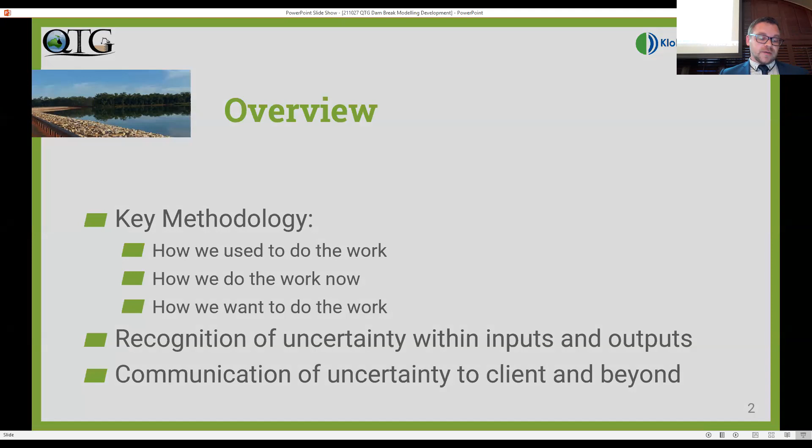This change isn't unique. Government and municipal facilities have also seen a reduction in the apparent risk tolerance from the general public in relation to infrastructure immunity and the commensurate increase in demanded design life of public infrastructure. So my presentation today intends to cover some of the developments that we've seen over the recent period. I'll also cover some emerging methods and what will likely be commonplace in the near future. To cover this scope, I'll approach it in a traditional engineering fashion, which is to try and represent an incredibly complex issue by breaking it up into smaller, simplified pieces, solve those pieces and hope it still represents the final product when we put it together at the end. This way, hopefully I'll avoid any overly technical issues while still providing enough detail to explain the challenges involved. I'll be presenting this from my point of view and my experience, and given the expertise in the room, I'm sure I'll raise some points of comment or conjecture. So please, I'm happy to address those or receive comment at the end of the presentation.

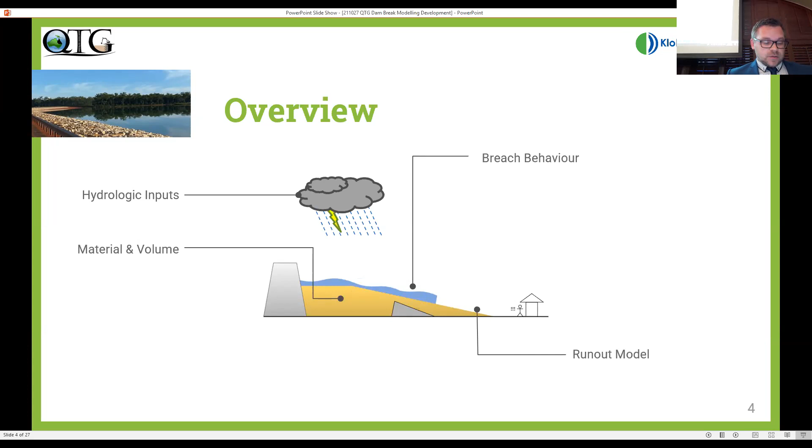I'll start with an overview of the inputs to a given study. Here we have our facility with a finite volume of material, of which it has particular material properties. Its initial state can be described as a solid mass of material with geotechnical properties. There may be some additional event contributors to the breach itself, and then once that material is mobilised, it can no longer necessarily be described with geotechnical parameters, and its behaviour may be represented as a non-Newtonian fluid. The run-out behaviour of this material can be estimated using numerical models and the potential impacts quantified. The summation of these downstream impacts forms the basis of most regulatory and industry-guided consequence category selections.

So initially, we'll look at the material and volume aspects of the system. I recall my first application of a TSF dam failure some years ago.

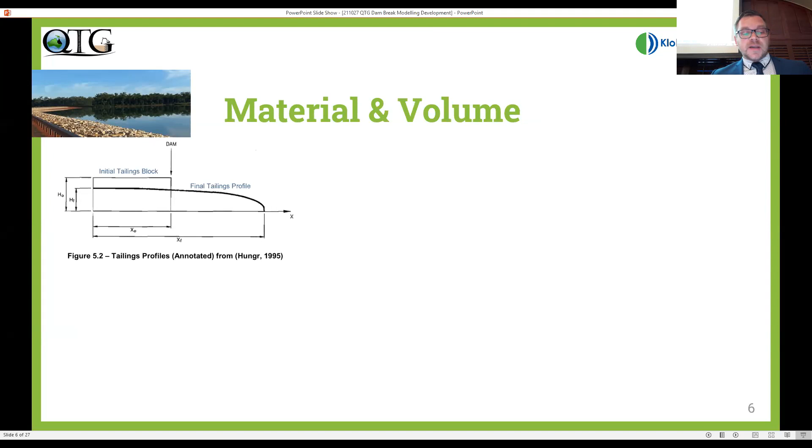I used a simple run-out formula that was based on the estimation of shear strength and assumed volume of tailings, based on a block or a triangular wedge of tailings material, and that was it. There was no run-out. Well, that was the run-out extent.

At the time, that was a fairly simple analysis, but it also wasn't uncommon to see non-Newtonian behaviour being completely ignored by modelling the facility as water. Sometimes this was due to the absence of information. Sometimes it was due to limitations in software or expertise.

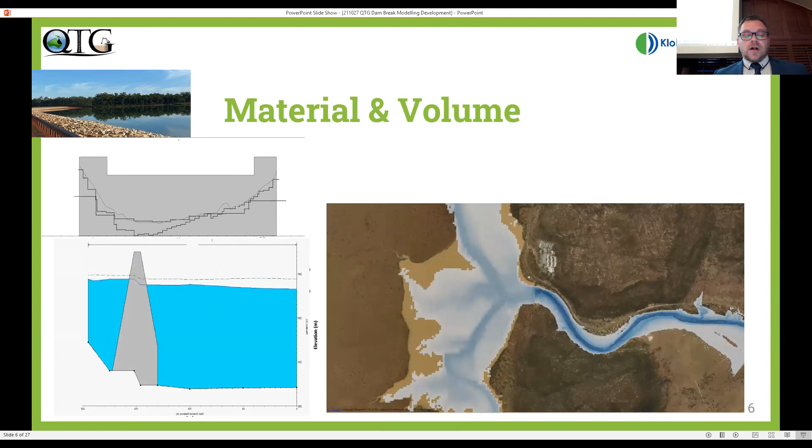The outputs were generally presented as being conservative. However, there isn't really a whole lot of evidence to support that position. Ultimately, these methods ignore most, if not all, of the flow properties and characteristics of the material that are actually within the TSF.

Current practice, in line with recent guidance like CDA, uses an assumption of a mobilised tailings volume based on a geometric method. In this way, we can at least consider the height and the geometry of the facility. We create our post-failure surface, which then holds our nominated volume of mobilised tailings.

One of the more influential parameters in those series of assumptions or estimations is that post-failure angle, being the main sort of driver of the overall volume.

This method is far better than, say, assuming a third of the total facility or other sort of empirical relationship, but it's still a fairly weak connection to what's actually happening within the TSF and the actual geotechnical state of the materials. Once we have our mobilised volume of non-Newtonian behaving material, we provide the numerical model with some parameters to describe how that fluid behaves for a given solids content.

A process that also has its fair share of assumptions and potential areas of error, and it's how it responds to shear.

A couple of things to note is, again, there's some assumptions related to the density of the material. We can look at the density of the in situ material.

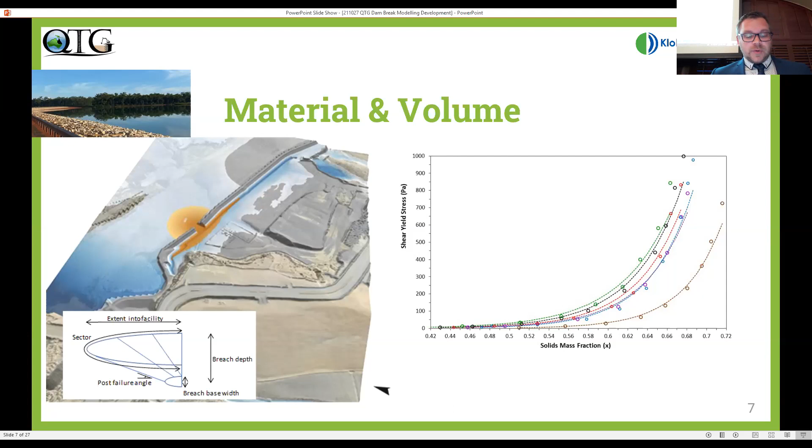It's not necessarily the case that the run-out material's solid concentration is the same as what it starts at when it's in situ in the facility. Once flowing, it can vary in void and moisture content.

Secondly, in its real state, there's obviously a lot of variation between the tailings material, whereas the most common approach is to adopt the whole facility as one particular homogeneous material.

I'll revisit this later, but from this point, we've got material properties that we can represent within our numerical model. One of the shortcomings of the description I've just given is that we don't actually capture the change in state from a solid to a non-Newtonian fluid. We're starting with the non-Newtonian fluid within the facility. However, there is some development in this area.

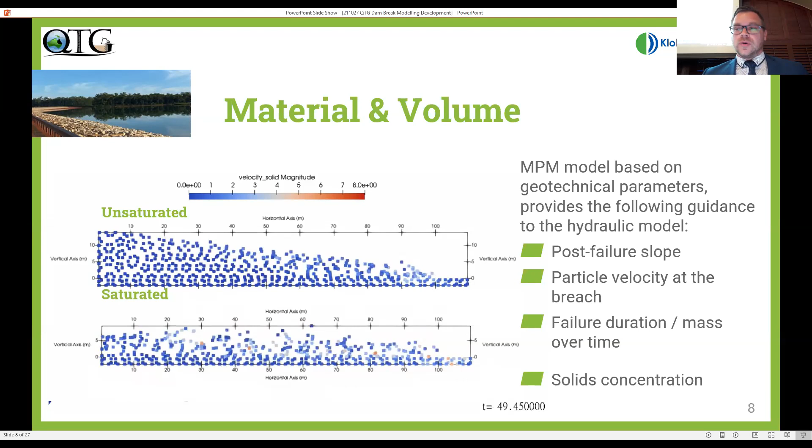So while the ultimate goal may be to simulate the whole system, the low-hanging fruit that we can use the models for now is to inform other more simple models with the parameters that we generally assume or pull from empirical studies. So back to our simplified model inputs.

We'll skip over the hydrology for the moment and go straight to the breach component. This is another area where traditionally what we've modelled may not have a whole lot of connection to what's actually present within the facility. This issue is likely a result of the lack of information relating to how a breach may develop in a TSF.

Given that lack of guidance, the fallback option has generally been to assume the breach may develop in a similar fashion to a water dam. While that may be true in some instances where you've got a lot of water and a soup-like TSF, and the main contributor to a breach might be an erosion style breach, there's very little understanding of how the tailings material influences that process. And we're not representing pure liquefaction failures where you get whole embankments removed.

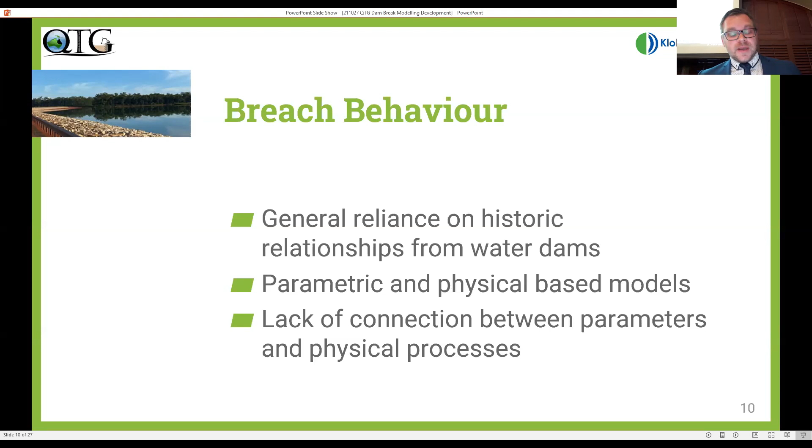However, there are some improvements available. For one of our recent projects, for a study on a water dam, we used a probabilistic Monte Carlo model to investigate just how much different breach parameters affected breach outflow. We used industry guidance to put bounds on different parametric breach parameters, such as time to failure, breach widths, depths, different weir and piping coefficients.

We ran that model 10,000 times with different combinations of those inputs. The output model showed the huge variation in peak flows that we could expect while we move through the different ranges of parameter inputs. There is no reason why we can't do a similar approach to a non-Newtonian dam failure.

Remember back when I mentioned the different solids content and how much the shear rate changed between those two samples? That's the perfect parameter that would be used in a probabilistic assessment for a non-Newtonian dam case.

Similarly, the post-failure slope angle would be another perfect candidate. Ultimately, what we'd be working towards is a model breach that can be presented as a most likely. So you're still developing your deterministic solution, but you've also got upper and lower bounds based on the combination and variation of input parameters.

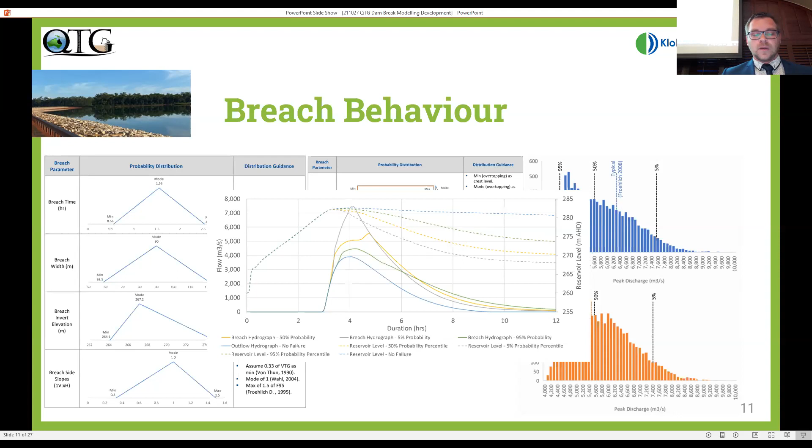What I'm trying to show is that if you've got a really good hydrologist or flood engineer on your project, and they have good data and do a really good job, then you should end up with flood estimates that follow that curve. However, as the scatter of the plot indicates, your design value might vary by plus or minus 50% relative to just this example. And if we look at the probability, we're only at about 1 in 100.

So you can imagine the gain in those confidence limits associated with a PMP or your more extreme events moving off to the right.

And so by definition, the PMP being on the edge of credibility would have massive uncertainty attached to it. And so even with a good solid estimate of extreme rainfall, are we adequately representing this in the rest of our analysis, considering how much of an important part it can make to the study?

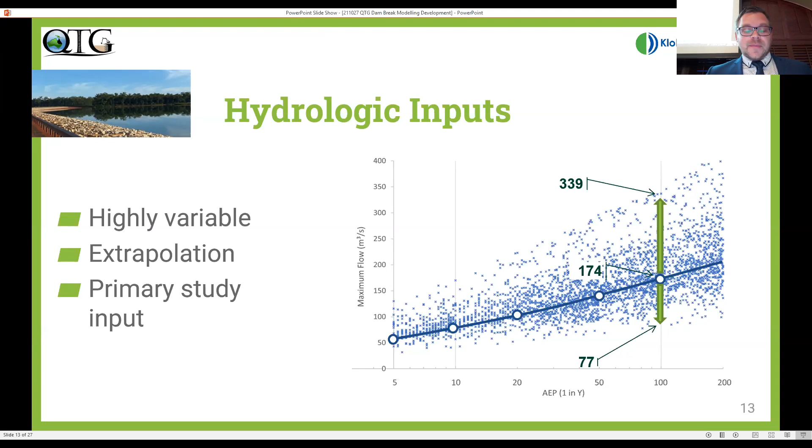Back to our system inputs. The run-out model area is somewhere where we have seen considerable improvement in terms of the modelling methods available over the last couple of years. I'll keep it fairly agnostic in terms of software selection, as I think the most important part is having a suitable modeller to drive the model rather than the best model, and they correctly understand the situation that needs to be modelled.

So the way that it's typically been modelled historically is to develop a single model representing the facility as a stage storage curve or a 1D model. That model might have a breach as a weir for an overtopping failure, or an orifice for a piping failure. It'll have dynamic geometry that changes its width or elevation over time, and the outcome being a breach hydrograph or a similar relationship of mass over time.

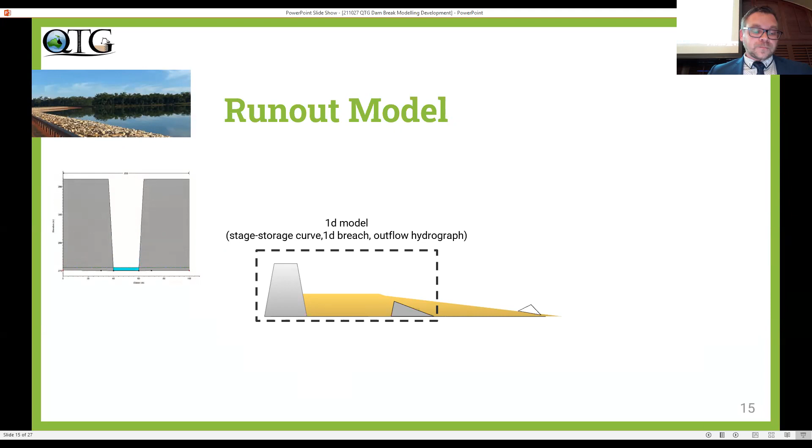This output hydrograph would then be added to a more detailed numerical model of the downstream area. That separation between models, or decoupling between the facility and the run-out area, can be a significant source of error due to the assumptions in the boundary condition coming out of the first model, and similarly the assumptions attached to the input boundary condition of the second model. It can be made to work, but in the majority of cases, not enough time is spent ensuring that the two conditions are consistent between the two models.

The way that we've been schematizing the model more recently is to include both the facility and the downstream area within the same two-dimensional model. However, we run the model twice, in line with the CDA guidance on process 1 and process 2 flows. Once for the non-Newtonian fluid, and then we use those results to inform a second model where we run Newtonian fluids for decants, or you've got storm events getting added.

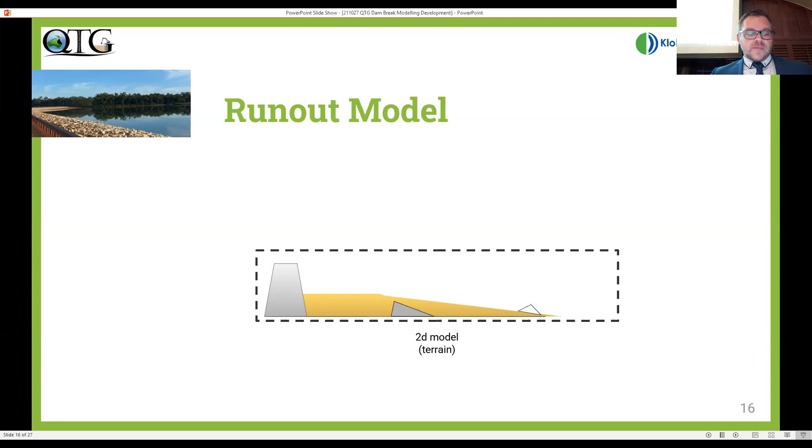And this arrangement means that we're representing two distinct phases of the material, which is fine for scenarios where mixing isn't a considerable input. So if you're running into a waterway or a lake, you may need to reassess your need for a full mixing model and that behaviour to be represented.

So while we remove the one-dimensional model, it doesn't necessarily preclude a smaller model just for the facility and the breach being developed. Obviously, being a smaller model, you can run it lots of times. It's normally where a lot of churn happens in the work, but the arrangement of this does force the modeller to assess how well the two models agree with one another.

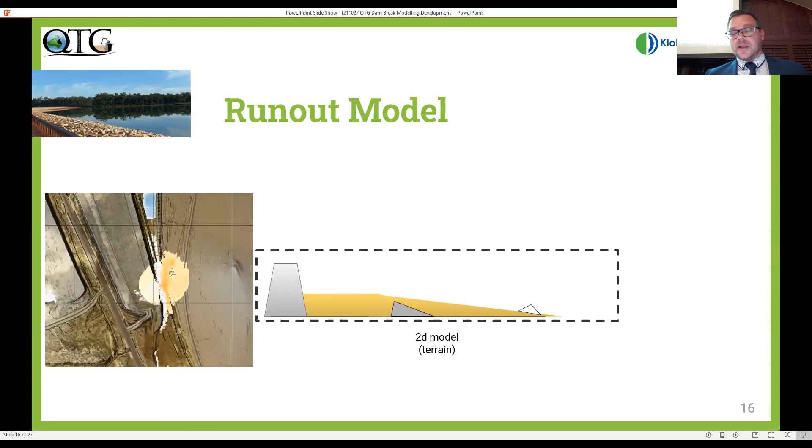Where I see us moving in the next year or so is, well, sensitivity testing across different projects has shown that we can have great, precise downstream models, but the potential variation associated with parameters that we put in up at the facility have a far greater variation and impact on what's happening downstream than the actual 2D model calculation.

So obviously getting those parameters right up front removes that problem, but we know that's not always easy to do. What we can do, however, is approach the greatest areas of uncertainty with a probabilistic assessment. Rather than attempting to assign a deterministic single value to parameters that are inherently variable, we can provide a range or a distribution of material parameters, breach widths, post-failure slopes, rheological modelling, numerical parameters, and we can either run an ensemble of 10 or 20 simulations, or go the full Monte Carlo and do 1,000 simulations, the output of which is a distribution.

We can select either the mean or the most likely result, and you can also present your maximum and minimum extreme ranges. So when we develop the output in this way, we inherently carry through the understanding that what we're presenting as a deterministic output may not be exact, and it does have some measure of uncertainty.

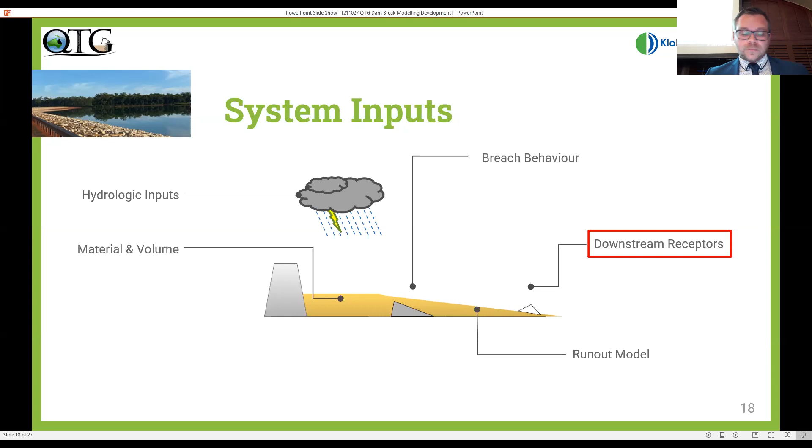In most cases, the method used is a static assessment of population, basically overlaying the run-out extents on a map of population locations and summing up those affected, which we term population at risk. In some assessments, if we have suitable data, there'll be a fatality multiplier applied - the statistical chance, based on historical events, that a person identified as being at risk will lose their life, which gives the potential loss of life.

The method is very coarse. It doesn't allow for human behaviour, doesn't account for varying physical abilities, and is very crude in its application of warning time - you either get it or you don't, and you get out or you don't get out. There's no grey area. Some of the more advanced methods available now are life simulation models.

A life simulation model has been around for a number of years, but it got serious following hurricanes Katrina and Rita in the States, where the evacuation of New Orleans and Houston was hampered by traffic congestion and escape routes. I think that first one was Hurricane Rita - there were 120 deaths in the evacuation, which was more than the hurricane itself, and that's why it's important for that particular scenario.

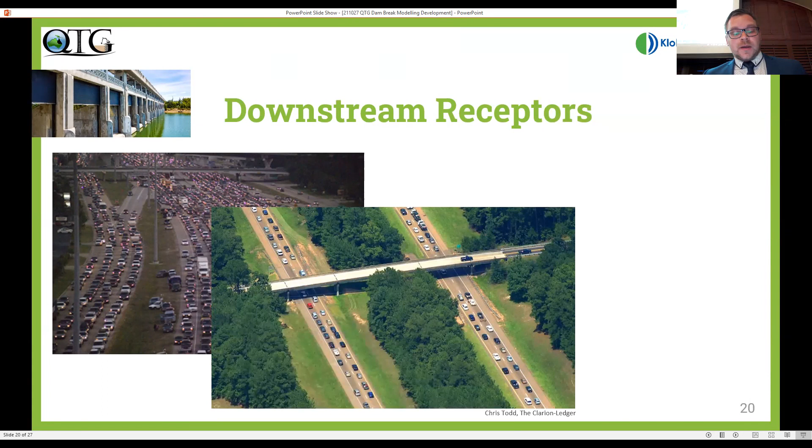Later, the Oroville Dam incident provided a great data set to evaluate the effectiveness of mass evacuation of urban areas. A life simulation model is a dynamic network model.

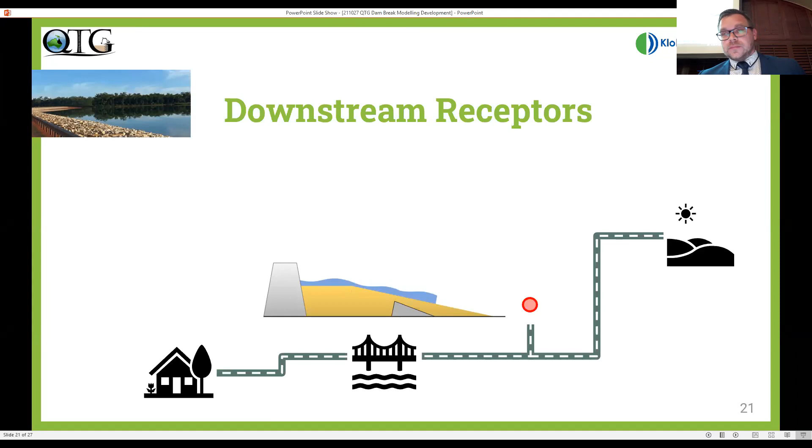What that means is for each population location, it's represented individually as a node or a point. Roads or paths create a vector network, and our breach model, flood model, bushfire, lava flow, or anything that moves over space over time can be represented.

The model allows the population to mobilise either on a warning time or a proximity to a hazard, utilise road and escape accesses with consideration of whether in a vehicle or on foot, and it will then consider the capacity of the road network. It'll determine whether road networks are trafficable or cut off by the hazard.

It'll then turn the population at risk around and find an alternative route - it won't work if it won't, and it won't go back and try the same route again. It can model the differences in survivability between escaping out in the open or being in a structure, whether that structure is timber, steel, or masonry. All of these things can be put into the model.

What I think the most clever part is, and ding, ding, ding, there's a theme here - it's probabilistic. It can randomise, using specified distributions, what certain parameters are for each point at risk. So not all population at risk will take the same route, not all will react and respond the same way at the same time, and not all have the same physical ability and survivability.

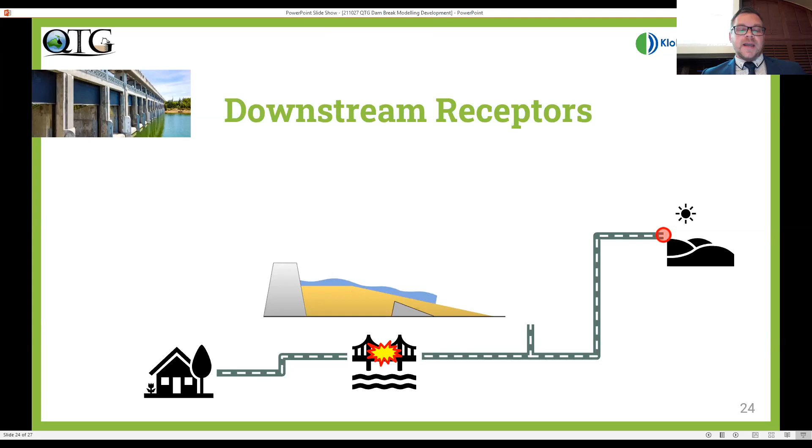And so this modelling method, I think, provides the closest proxy we have to account for an individual's behaviour and response during an extreme event.

When compared to historical events, a well-developed LifeSim model represents the population at risk and probable loss of life far more accurately than the simplified methods typically used in static assessments. Granted, the cost and complexity of setup is reasonably significant, especially at first, and it's not going to be economically viable for every application, but it's getting used in mainstream large water dam failures, and it's only going to become more commonplace in more run-out assessments and facilities. It's definitely the way forward.

In summary, we've explored the pertinent inputs to our dam breach models, how we've traditionally estimated these inputs, how we're currently working to reduce that uncertainty and recognise the variability in results, and what I think we'll be working on in the near term to further improve our assessments.

I hope that providing this overview reminds us that the assumed inputs within a great model are still assumed inputs - and are we suitably communicating that level of uncertainty through our reports to clients? We all understand that uncertainty is part of any engineering study, and one that traditionally, through either complexity or convenience, hasn't been well managed or communicated.

In application to dam breach models, I hope that our work and its outcomes in the near future will help plan and inform our clients of the risks and potential consequences that may lie within these facilities.

Thanks very much. Can you hear me all right? That's fine. Go ahead. I'm just trying to minimize this banner. Don't worry about it, we couldn't last time either.

Thank you, David, and good evening to all. The topic of the presentation tonight is a realistic approach to tailing dam break analysis using site-specific parameters and laboratory testing.

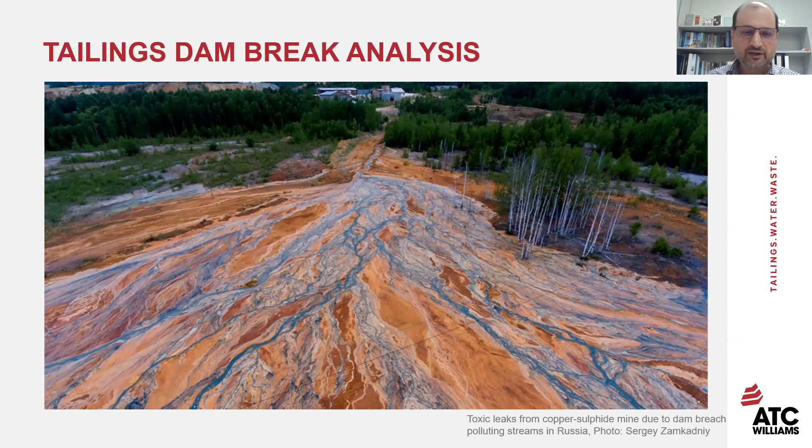Go ahead, Ben. Okay. That image on the screen is a toxic chemical and tailing release from dams in Russia, just to refresh our memory about the failure cases that happen around the world every year. I'll go through a few dam break examples around the world just to remind ourselves that dam break is a reality that happens every now and then around the world.

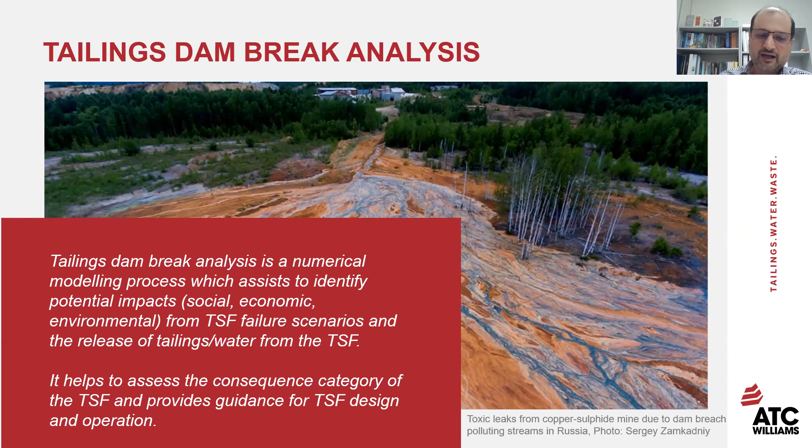Tailings dam break analysis is a numerical modeling process which assists to identify potential impacts — social, economic, environmental — from TSF failure scenarios and release of tailing and water from the TSF. The analysis will help assess the consequence category of the TSF and provide guidance for TSF design, approach, and operation.

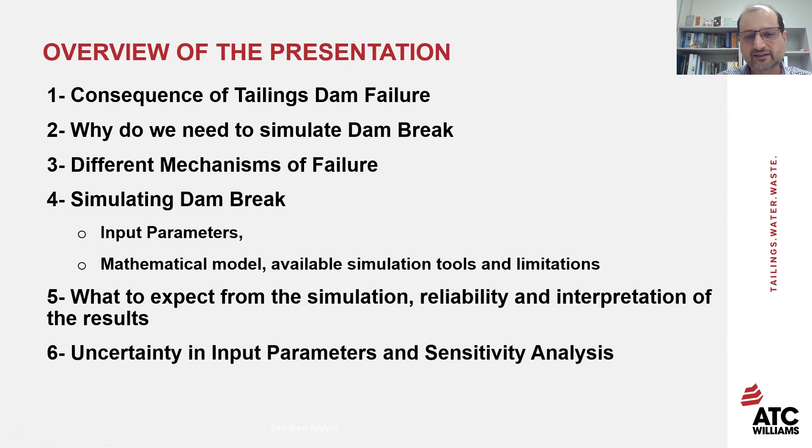The overview of this presentation: we start with the consequence of tailing dam failure, then why we need to do dam break analysis, the different mechanisms of tailings dam failures, and then simulating dam break, including input parameters, mathematical model, available simulation tools, and limitations. Then we review what we should expect from the simulation, reliability and interpretation of results, and finally the uncertainties in input parameters and how we should do sensitivity analysis.

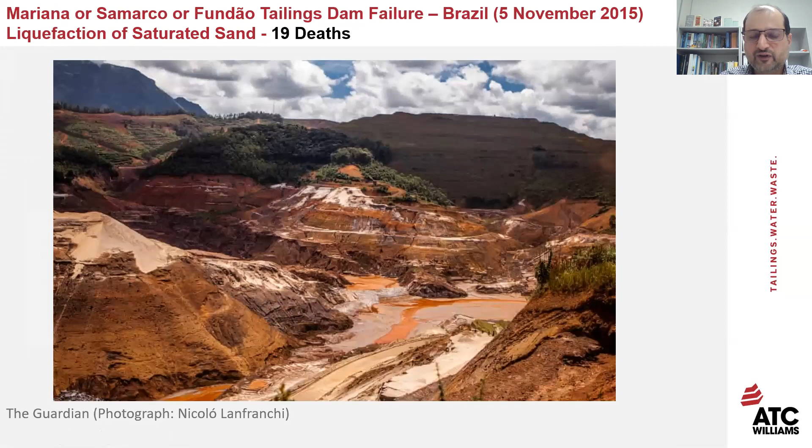Another one we're all familiar with is the dam break of Mariana, or Samarco dam failure, or Fundão dam failure, due to liquefaction of saturated sand, on the 5th of November 2015, which caused significant environmental impact and also 19 deaths.

The other famous dam break that happened a few years back, on 4th of August 2014, is a foundation failure of Mount Polley that resulted in 8 million cubic meters of tailing released to the environment.

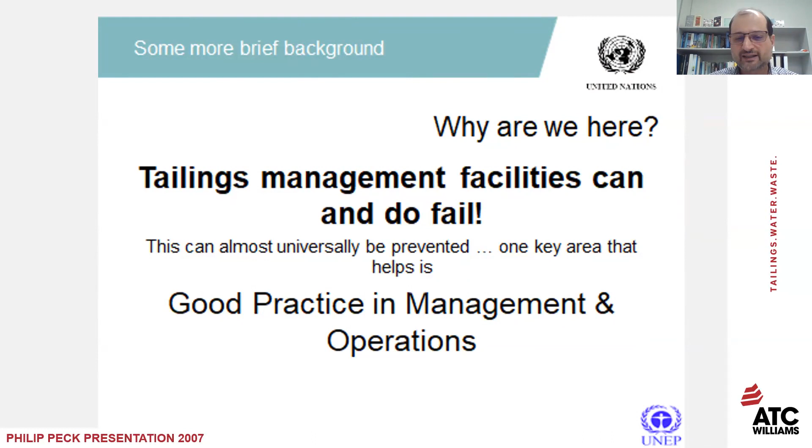Philip Peck, in his presentation, ended with the conclusion that tailings management facilities can and do fail. This can almost universally be prevented, and one key area that helps is good practice in management and operation. With that in mind, knowing that the consequence of a tailing dam failure can cause loss of life and huge environmental impact, we go to the question of why do we need to simulate dam breaks?

The guideline we usually use in Australia is the ANCOLD guidelines on tailings dams and consequence category assessment for dams. It requires that inundation depth and velocity mapping for the tailings dam be prepared and studied. The consequence category, severity of the impact, population at risk, and possible loss of life are to be defined in the design as design parameters for the TSF, and then an emergency response plan is to be prepared for the TSF. More recently, the GISTM standard also requires that credible failure scenarios be defined for the tailings dam, and that site-specific emergency preparedness and response plans be prepared for any TSF storage facility.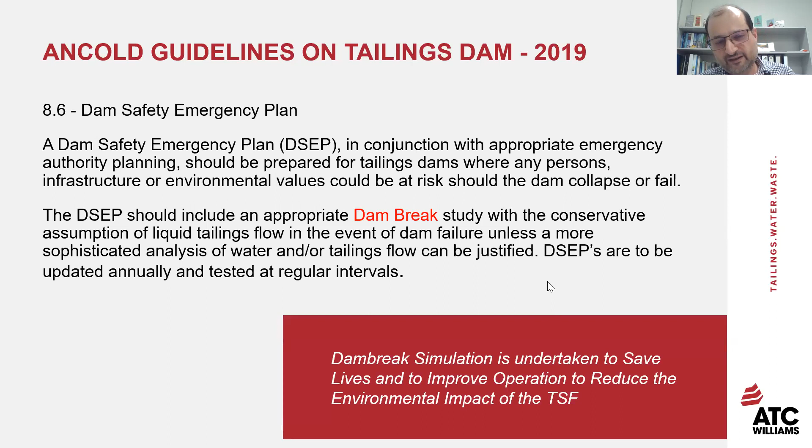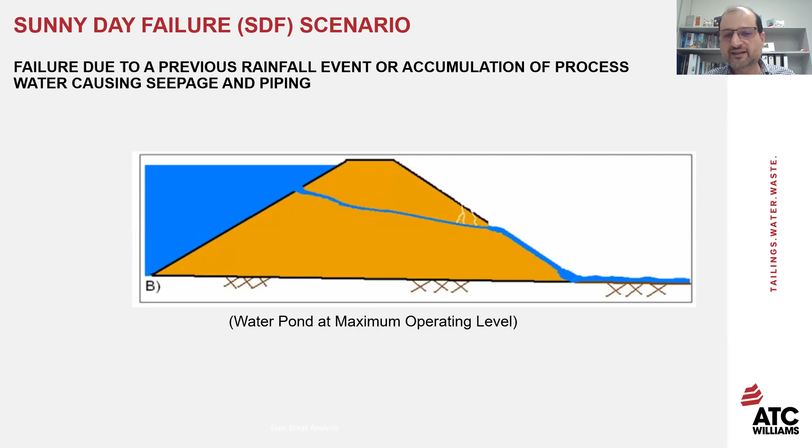Different mechanisms that can cause a tailing dam to fail can be summarized as either a sunny day failure scenario, which is failure due to a previous rainfall event stored in the dam, or accumulation of process water causing seepage and piping failure through the embankment structure. Usually the assumption for this sunny day failure is that the water pond is at the maximum operating pond level, an opening occurs in the embankment, seepage increases in the embankment, and then it gradually causes failure of the embankment to a certain height or total failure of the embankment.

Sunny day failure can also be caused by sudden failure induced by earthquake or static liquefaction. The dams store tailings and water at maximum operating pond level, and all of a sudden, due to static liquefaction or earthquake, they fail.

The other mechanism for failure is post-flood failure, or flood failure scenario, which is usually associated with a breach process due to overtopping failure during a flood. In that case, the water at the pond would be at maximum flood level, depending on what the design storm or PMP event is for the dam. The overtopping can cause washout of the embankment to a certain height, or full washout of the full height. If the failure of the embankment happens due to overtopping during an extreme flood event, it's usually assumed that the natural catchment downstream of the dam is at peak flow condition prior to failure, which is called in the literature an incremental impact assessment.

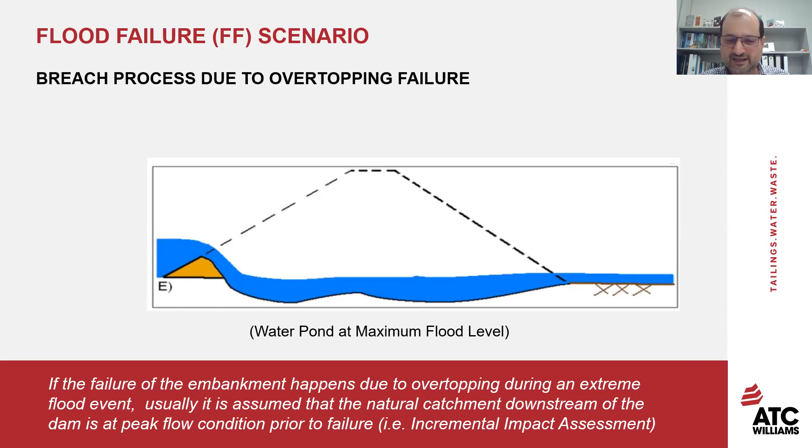Another graph from the same paper, by the same author, analyzed the same 85 cases. Out of those 85 cases, 46 were dam failures on upstream raised embankments. This graph shows the mechanisms that caused failure in those upstream raised embankments: 30% of all the failures were due to liquefaction, and 28% were due to slope instability.

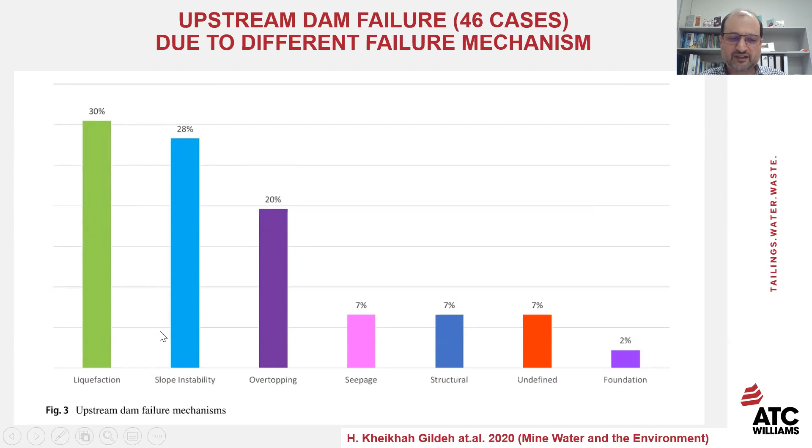Simulating the dam break. There are several steps that need to be followed to do a tailing dam break assessment and simulation. Step one would be defining credible failure mode.

We need to ask if the sunny day failure with maximum operating pond level would be causing a credible failure mode, or a post-flood failure overtopping during the design flood or the PMP event is a credible scenario. If failure of the dam during a flood event while downstream catchment is at peak flow condition, if that is a credible scenario. If sudden failure of the embankment due to earthquake or static liquefaction is a credible scenario.

What we should keep in mind is we should always avoid creating imaginary scenarios which are near impossible cases and hard to justify. In other words, adding up multiple rare and extreme events on top of each other.

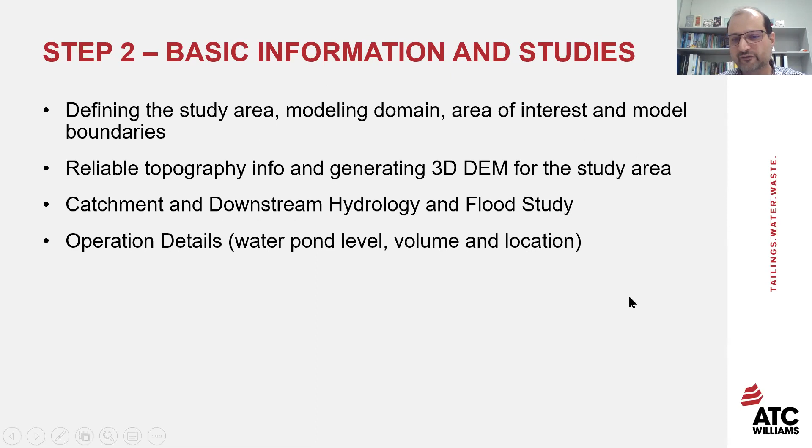Step two will be basic information and studies, including defining the study area, modeling domain, area of interest, and model boundaries, reliable topography information to develop the 3D digital elevation model for the study, catchment and downstream hydrology and flood study, operation, the details of the operation, including normal operating pond level, maximum operating pond level, and volume and location of the pond in the TSF.

Step three would be site investigation and collection of the data from site. That will include density profile with depth for the deposited tailing in the deposit. Are the deposited tailings saturated? If they are not saturated, then the next question is whether there is any possibility that in the future, for any rainfall event, storm event, or any scenario, the tailing could get saturated. Where is the phreatic surface in the tailings body is also another question that we should be studying and finding the answer to.

CPT testing and shear vane data from site, and then liquefaction study and assessment, and answering the question of whether the tailings or embankment foundation material or any layer under the foundation of the dam would be liquefiable.

This data usually for any stage embankment and the future raises of embankment, a lot of this data is already available usually for the dam, and needs to be extracted out from the previous study.

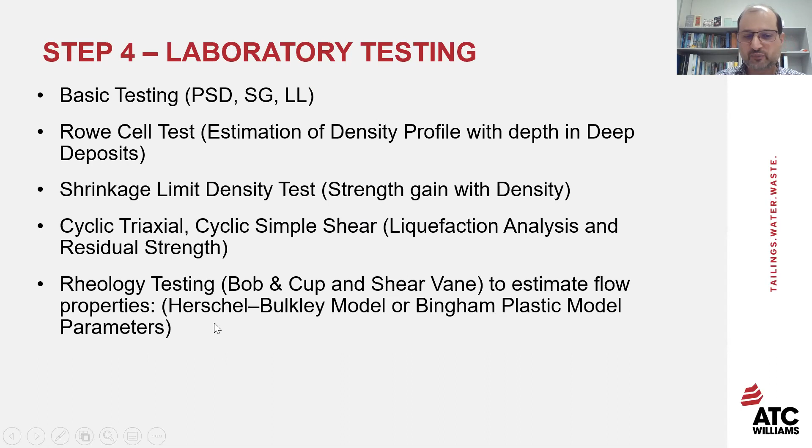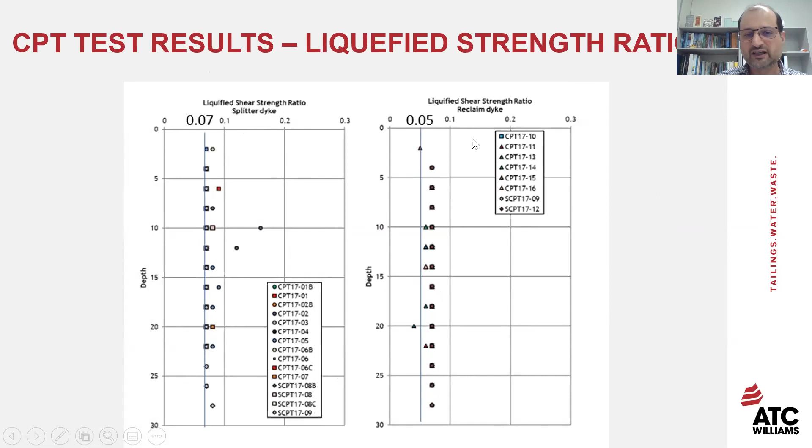Shear vane data, CPT data from the same site to a depth of 30 meters, which has defined the liquefied shear strength profile for the two locations, or residual strength after the material is sheared.

Then the rheology testing will come from the laboratory testing: Bob and Cup rheology, and also the shear vane data as well to extrapolate to the higher solid concentration, which is beyond the capacity of measuring with Bob and Cup.

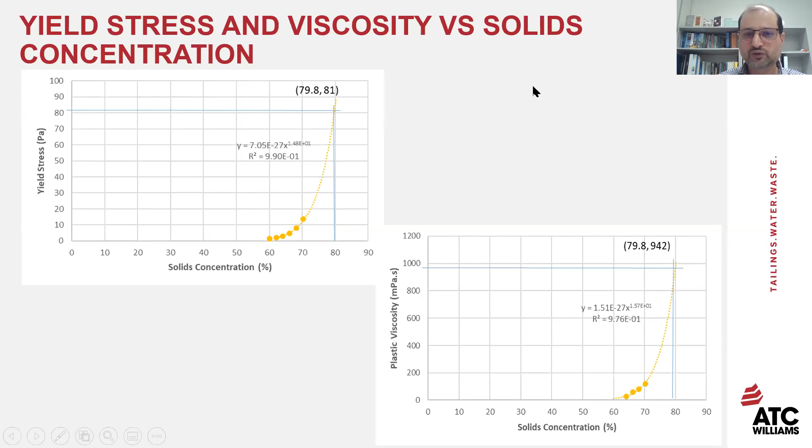Then fitting that model, usually in the tailing study, the best fit model is the Herschel-Bulkley model, but it can be simplified to a Bingham plastic model as well. Ultimately, we are after defining the yield stress and viscosity as a function of, or versus, solid concentration, so that the model can account for changes when the solid concentration of the released tailing from the dam mixes with water or solid drops, and can vary during the analysis.

The equation we use for this analysis is infinite slope theory, derived from the stability of a long shallow slope. The theory assumes that after liquefaction of tailing, the tailing strength would be greatly reduced, resulting in slumping of the tailings until they reach a slope where force balance has been achieved. The equations, as you see on screen, reference the paper by Kit Seddon in 2007. You can study it further if interested.

Essentially, the post-liquefied slope of the failure surface is beta, and it is a function of undrained post-liquefied shear strength and the total unit weight of the ash or tailings, depending on what you're studying, along with vertical strength.

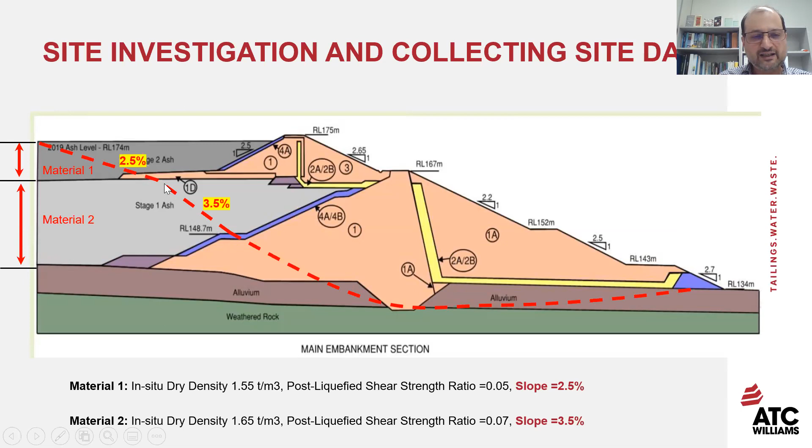So your failure surface can be a multiple sort of slope and shape that best estimates the volume released from the embankment.

That's applying that method to the embankment breach of 500 meters during the earthquake scenario, with a slope of 2.5%, assuming that all of the tailings in this condition, for this example, is saturated and liquefied tailings.

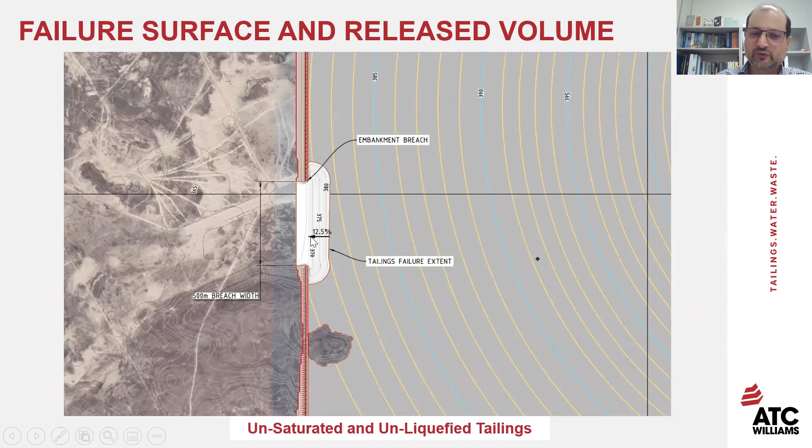If the tailing is not saturated, this is a CTD, central thickened discharge, with the tailing not saturated. That's the concept of design for central thickened discharge. As you can see, the tailing release volume is significantly reduced, and the slope of failure is 12.5% if the tailing is not liquefied and not saturated.

For each, if you're analyzing the overtopping and piping failure, then we need to define the breach parameter. In the literature, you can find different methods and models proposed for that. All of them are based on regression of previous dam failures.

More recently, in 2014, a paper by Knight and Froelich analyzed 88 dam failure cases from a database. They concluded that out of the parameters reported for those 88 dam break cases, the Froehlich 2008 method provided the best fit for the breach parameter. The Froehlich method is a regression method that defines the average breach width and the time of breach based on volume of release and the height of the breach, which comes from the previous analysis, step 5.

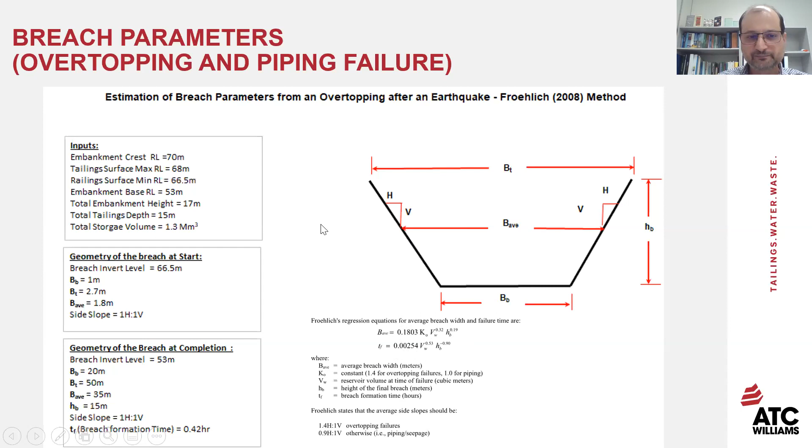Step 7 will be simulation of the failure scenario, selecting modeling tools with non-Newtonian flow analysis capacity and also the capacity to consider solid particles. Assuming water-like property for tailings dam break analysis, we have to remember that it will not necessarily produce a conservative assumption and a conservative result. Always check the fundamental mathematical model built into the software package, and make sure that as a minimum, it includes the turbulent terms in the energy loss equation.

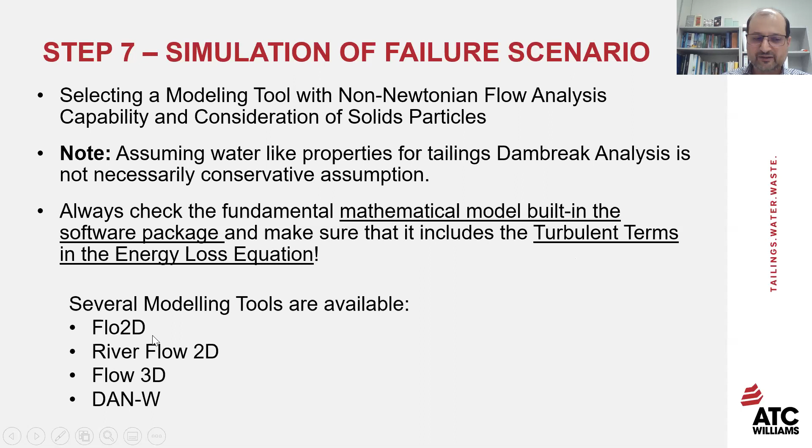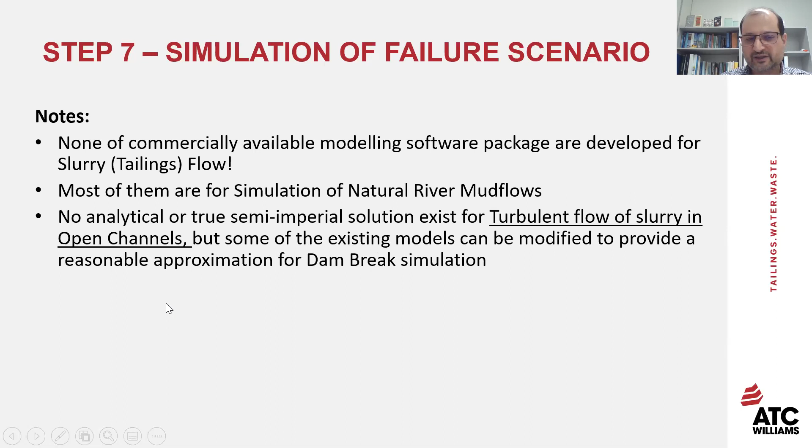There are several modeling tools available in the market, from Flo2D, River Flow2D, Flow3D, and DAN-W, and a few others, that have that non-Newtonian flow capacity. By using those software models, we have to know that none of the commercially available model software packages are developed for slurry or tailing flow. Most of them have been developed for simulation of natural river mud flow, and there are differences between the two simulations. No analytical or true semi-empirical solution exists for turbulent flow of a slurry in an open channel, but some existing models can be modified to provide a reasonable approximation for dam break analysis.

This is the fundamental model for the head loss in Flo-2D, which has got 3 terms: the yield stress term, the viscosity term, and the turbulent term for the head loss calculation. Although this is a very rough and crude estimation of the head loss for non-Newtonian fluid flow, it's reasonably acceptable for dam break analysis.

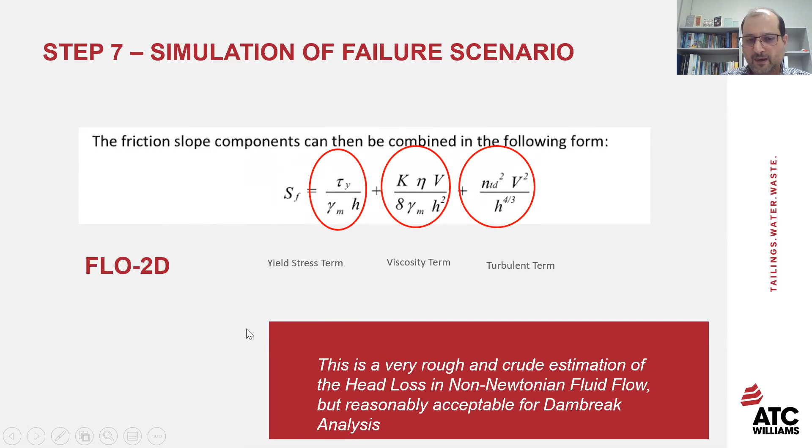We also have to keep in mind that using simulation tools or software that only have laminar regime equations as the built-in model will cause over-prediction of flow velocity and under-prediction of the flow depth.

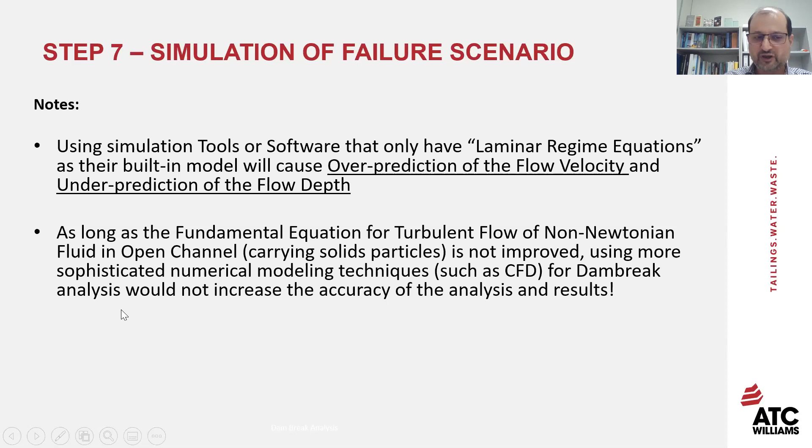One other thing to remember is, as long as the fundamental equation for turbulent flow of non-Newtonian fluid in open channels containing solids is not improved, using more sophisticated numerical modeling techniques such as CFD for dam break analysis or similar problems would not increase the accuracy of the analysis or the result.

We have developed multiple models. We have sponsored 3 PhD research works, including my own PhD research, and we developed several published models on the open channel flow of non-Newtonian fluid, thick tailing slurry, which is very similar to the release of slurries in the dam break scenario from a dam. The same mechanism, the same equation, the same fundamentals apply to both flows.

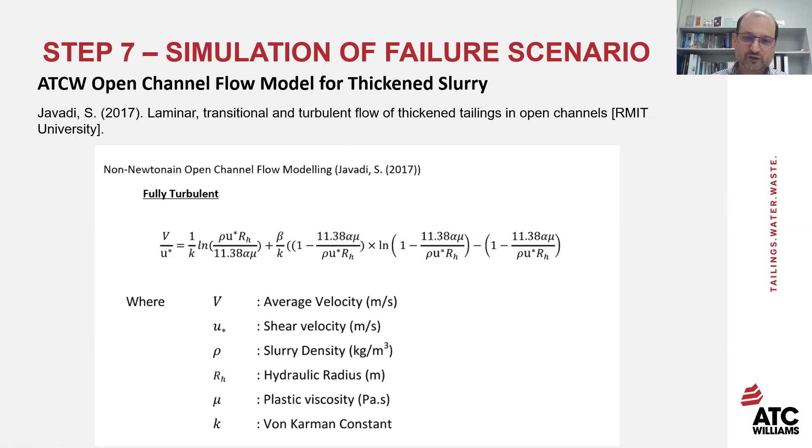One of the most recent PhD research works, done in collaboration with RMIT University, is Dr. Javadi 2017, which ended up developing a model for fully turbulent flow of non-Newtonian fluid in open channels and also transition regime. We currently use this model for open channel flow, but we are working on applying it to tailings dam break simulation as well - it's a work in progress. The accuracy of this model, or other models developed in research papers by others that are available, significantly improves the accuracy of the dam break or similar analysis.

Doing a non-Newtonian fluid analysis for a dam break, you can expect more realistic outcomes in comparison to water-like flow analysis. You can define the flow depth and velocity relationship.

One of the important things to remember is that when you're analyzing a yield stress material, the flow at some point will stop. The example on the right-hand side of the screen is the same volume released from the dam, but with a low yield stress assumption versus a high yield stress assumption for the material. As you see, for high yield stress material, the footprint covered would be smaller - at some point it will stop flowing. Whereas if you analyze it like water, it never stops - it actually flows until it reaches a point.

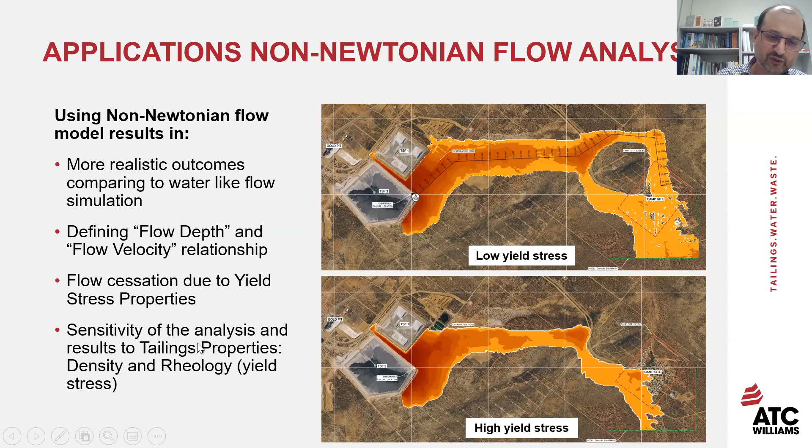Then you can do sensitivity analysis to see the result and impact of that analysis on the outcome of the dam break with that non-Newtonian fluid.

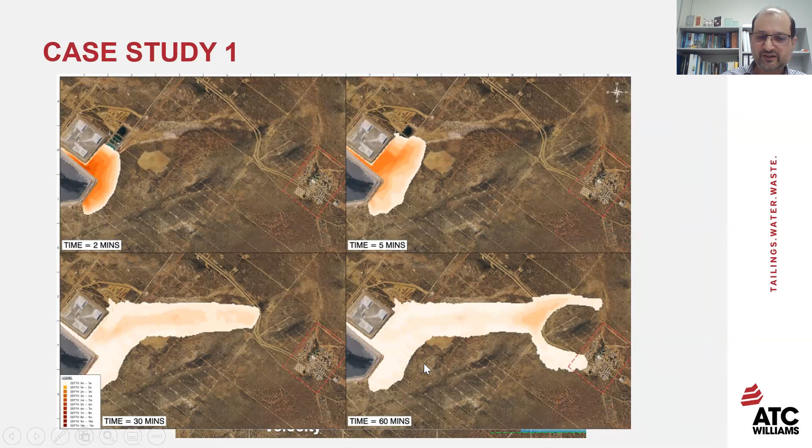One of the other things you can get out of this analysis is inundation mapping - inundation depth, inundation velocity - like any other dam break analysis. Then the progression of the tailing flood at the dam at different times, and time to peak, like 2 minutes, 5 minutes, 30 minutes, and 60 minutes. Another thing you can do is analyze and design a protective dike to protect the downstream infrastructure from inundation.

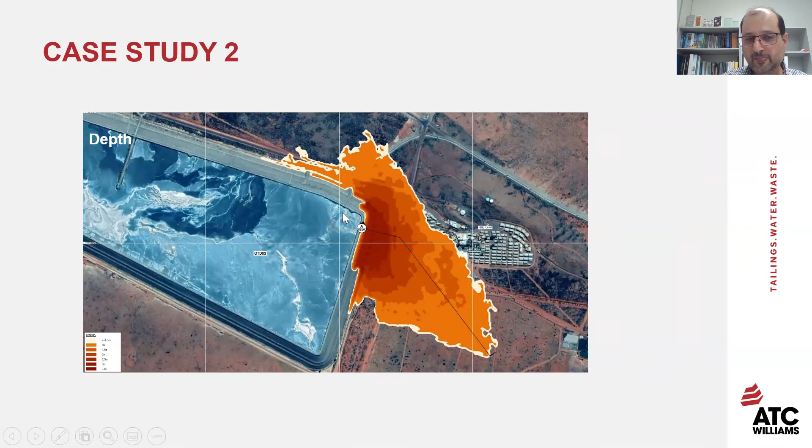This is another case study where the tailings release from the dam is assumed with the tailing being saturated and liquefiable. This shows inundation depth, inundation velocity, and time to peak, and the progression of the flood wave from the dam and the housing downstream of the dam, including the arrival time.

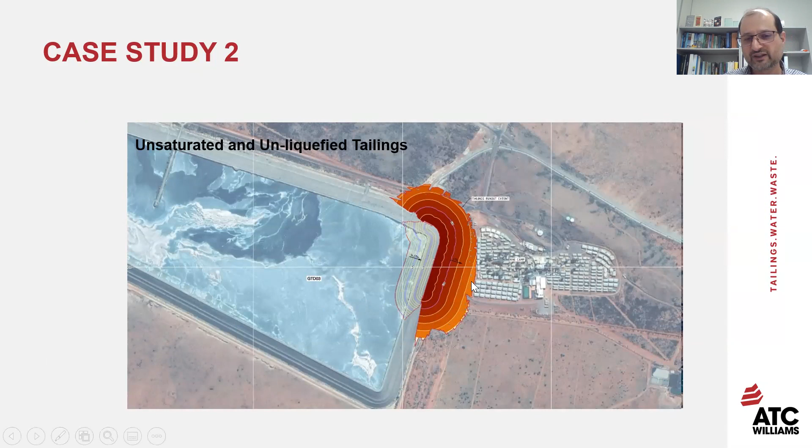Again, the same failure, the same actual location, the same dam, the same volume, but comparison to a situation where the dam and tailings keep unsaturated. If the tailings are unsaturated and you can ensure that during operation the TSF will never get saturated, or the pond will always be far away from that location, then the dam break failure would be reduced to a geomechanical failure with significantly reduced volume release and footprint, significantly smaller than downstream.

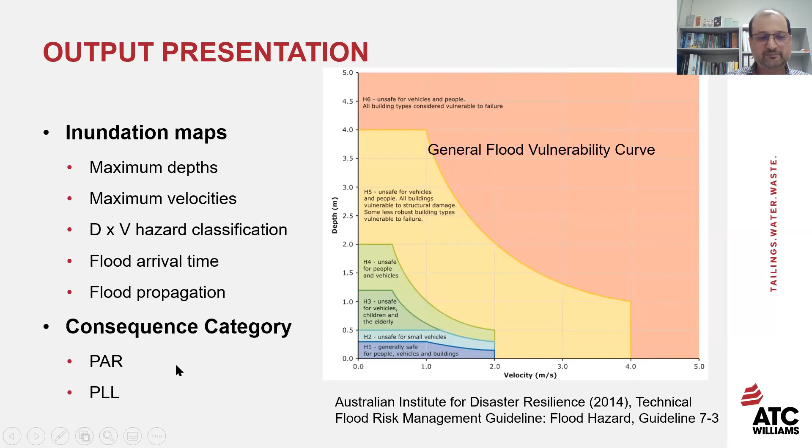The result of the dam break can then be plotted on a flood vulnerability curve in terms of maximum velocity, depth multiplied by velocity hazard classification, flood arrival time, and flood propagation. Then the consequence category of the dam, based on population at risk and potential loss of life, can be determined from the study.

Uncertainties in input parameters and sensitivity analysis: for every dam break, regardless of effort in site investigation or laboratory testing, because of the variability of site conditions, there's always uncertainty in input parameters, and that can affect the result of your analysis. This uncertainty can be in tailings in-situ dry density, post-liquefied shear strength, rheological properties of tailings, yield stress and viscosity, and breach mechanism or geometry of the outflow hydrograph.

It's recommended to always undertake a sensitivity analysis to see the impact of variation in these input parameters on the tailings dam break analysis and results. Without this sensitivity analysis, a dam break study would not be complete and would be questionable. The parameters may not have significant effect depending on the project and geometry, or they may have significant impact.

Thank you all, and that was the end of the presentation.

Now, Ben, if I could get you to stop sharing. Okay, I'll try—did that work? We'll come back to you for Q&A in about half an hour's time. Get my fingers to work, I wish I had my mouse. Kathy, see if your fingers are any better. Let me move that down to share screen. So the mouse is moving randomly. Hold on a sec, I need to adjust the volume. That's 100%. Okay. Teething problems?

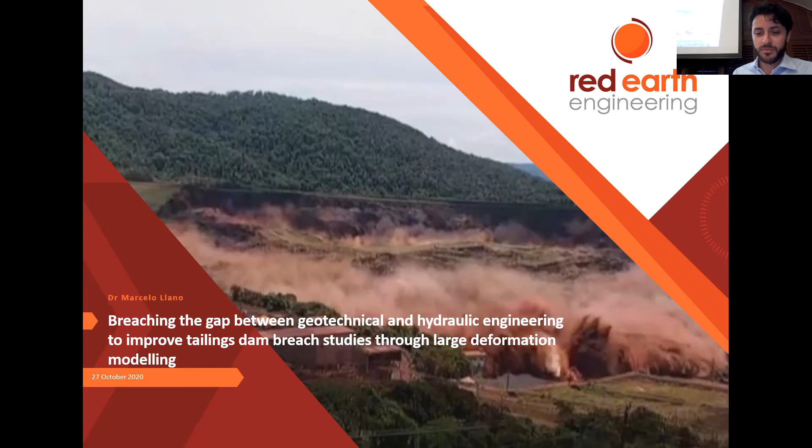Before I start, I would like to ask you to raise your hand if you are a geotechnical engineer, please. Okay, and how many hydraulic engineers? Okay, so most of the people are geotechnical, and we have some agnostic engineers.

A lot of my presentation is going to speak a little bit about the motivation of why bridging the gap is important. I'm going to talk a little bit about flowability of tailings, the mobility of those materials. Then I'll talk about the material point method, which is what I specialize in, and large deformation modeling using the material point method.

Then I'm going to speak a little bit about the effective stress concept, and that's the reason I asked you if you are a geotechnical engineer or a hydraulic engineer. So I know the audience, so I know that I probably need to stop a little bit there and talk about the effective stress concept. Then I'm going to go through a number of case studies of dam breach analysis where material point method has been engaged, and then I'm going to finish with some summary and final thoughts.

Okay, so these are a couple of notes from CDA 2021 technical bulletin, which was published a number of weeks ago, so quite recent. I took a couple of the statements that they made there, and I'm just going to read them because I want this message to get across. I was quite pleased to see what they wrote.

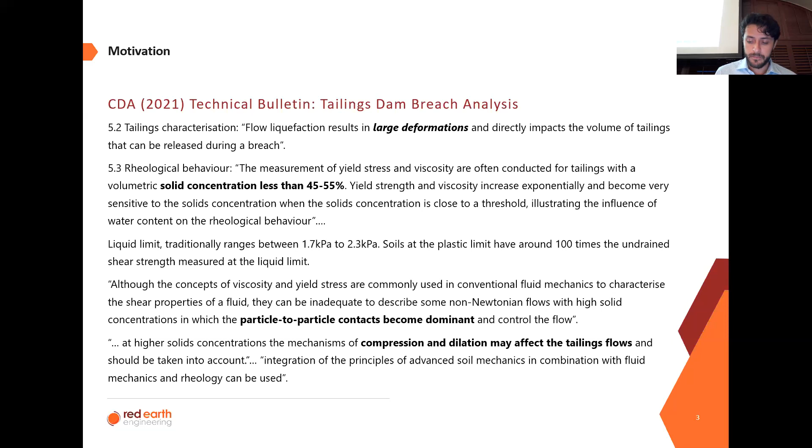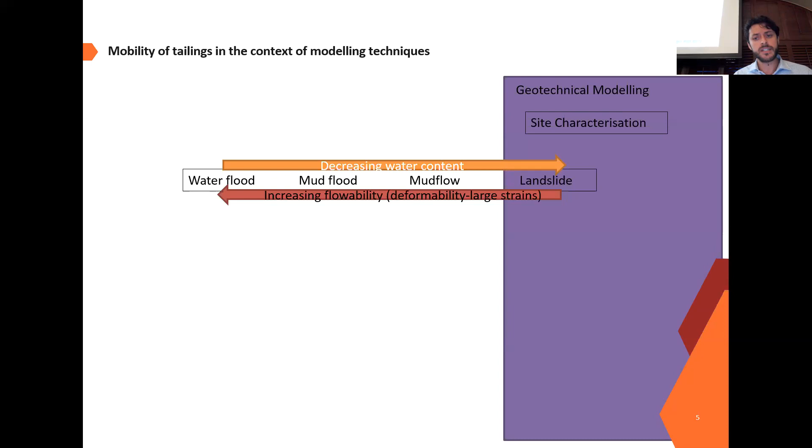The field where I perform, I'm a geotechnical engineer, so I'm around where that purple plot is. I sort of understand what a landslide is and how it behaves. My colleagues from hydraulic modeling, when they deal with rheology, they are on the other side of the slide. They know very well how to do water floods, mud floods, and mud flows.

As you can see, there is a gap there, because we approach from one side when we want to tell our clients about slope stability. That's what we sell. We tell the client, okay, this is your slope, it's going to be stable, right?

What I'm going to show you next, it's quite unfortunate that we have that label there, but we're going to see a bunch of white squares placed in that plot, and the relative position of those squares indicates where that technique is applicable to the phenomenon you see in the middle: water flood, mud flow, or landslide.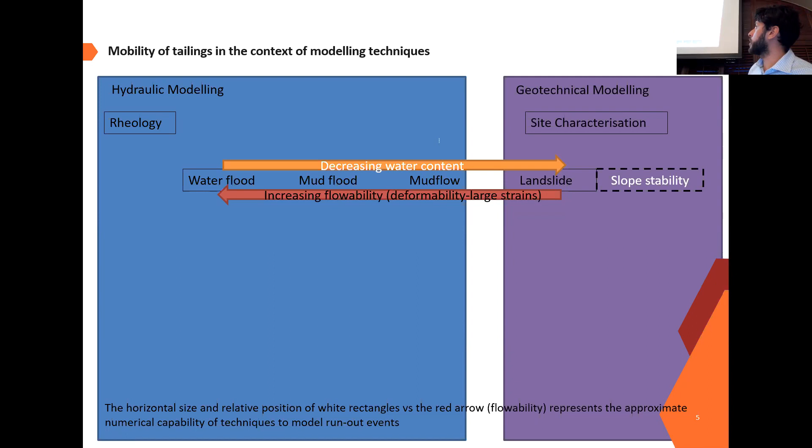I'm going to start with what we know best as a geotechnical engineer. When we speak of limit equilibrium, we are talking about slope stability. We are also talking about no deformation there—things just stay static.

As soon as you move towards landslide-like behavior, we are talking about stress-strain. Usually what we use in our practice is a small deformation approach. That's what you see in FLAC or Plaxis, or whichever provider you like.

Then when you are in the mud flows, you will be seeing flow slides, debris flows, slurry flows, avalanches. When you move to the left-hand side of the plot, you see inundation modeling. I just highlighted some of the providers that can give you a solution to model those processes, but there are many others on the market.

This is where I fit, or where I'm trying to sell you it fits: large deformation modeling, MPM. Go back one—you might notice there is a gap there. Your flow slide, debris flow scratches the surface of what a geotechnical model is trying to achieve, and your stress, strain, and deformation in soil mechanics does not even touch what these processes can get to.

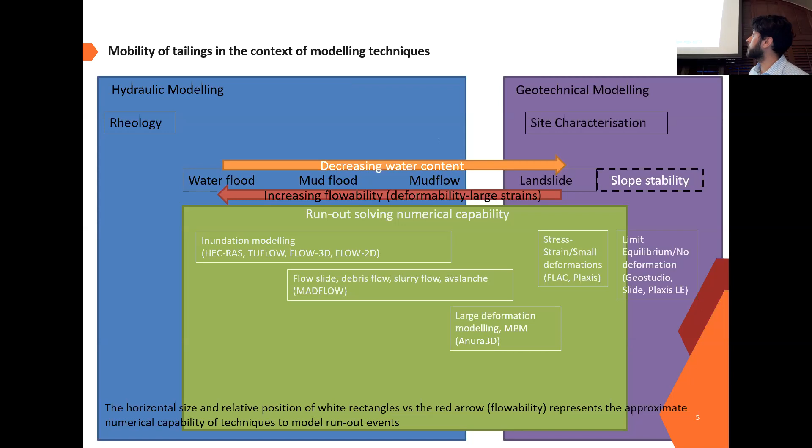That's what I meant, with the pun intended—we are trying to bridge the gap between what geotechnical modeling is and what hydraulic modeling is. Obviously, there is an overarching phenomenon here that we are not going to talk about, and no one has talked about much because it's quite complex, which is erosion modeling. Erosion modeling can trigger pretty much any of those events over there.

So what's my background with MPM? I was talking with Luke earlier today, and I said it's roughly a decade. It was October 2011 when I started reading my first paper on MPM. The name of my master's thesis is Material Point Method Applications to Geotechnical Engineering Problems. In 2016, I finished my PhD in geotechnical engineering at the University of Brasilia with an externship at the GEC in the University of Queensland, where I met Dave.

The title of my thesis is Experimental and Numerical Study of Geotechnical Engineering Problems Using the Material Point Method. We have published in excess of 30 scientific publications, not all of them related to MPM, including 2 papers in Géotechnique, and some of those papers have received in excess of 100 citations.

I'm going to be jumping back and forth, talking to the geotechnical engineers in the room and to the hydraulic engineers in the room. This slide in particular is directed to geotechnical engineers. Finite differences, which is what FLAC runs on, was introduced by Taylor in the 1700s. Finite elements, which is what Plaxis uses, was developed in the 1940s.

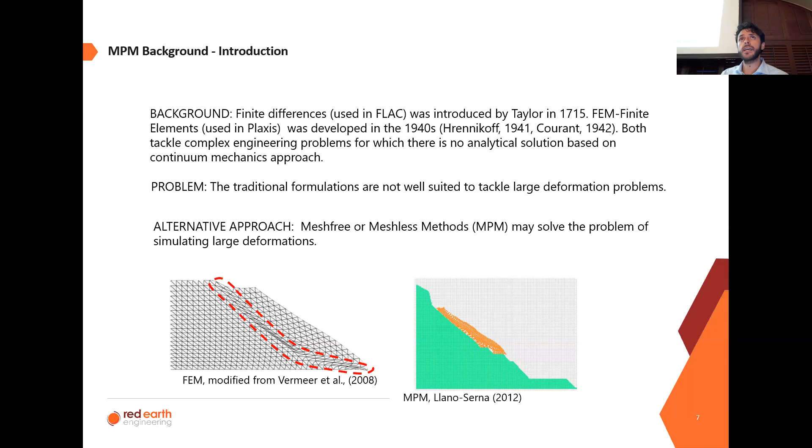To the left-hand side, you see a slope instability being modeled using the finite element method, and you see a region where the mesh gets large deformation and becomes entangled. Actually, these techniques are not well suited when something like that happens, so you need a technique that can handle this. You need to look further.

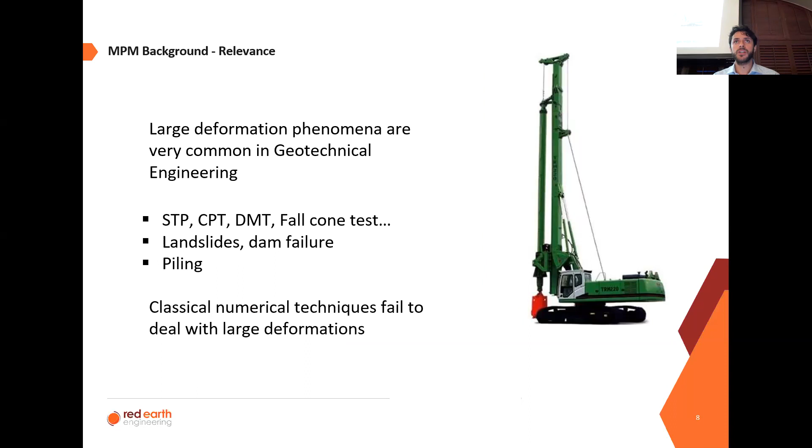Large deformations are quite common in geotechnical engineering: SPT, CPT, DMT, fall cone test, landslide, dam failure, piling. All of those are phenomena that deal with large deformations. I have some pictures here to exemplify them. As I said before, classical numerical techniques fail to deal with large deformations, again coming from a geotechnical engineering perspective.

So what's MPM? You have a background mesh, which is your universe, where your slope is allowed to exist, and that mesh computes everything that happens within the universe. Within that universe you have points, and those material points have finite dimensions and represent the actual discretization of your slope, your pile, or your CPT probe. They carry all the relevant information as they move, and they're free to move across the mesh.

So what's the development of MPM through the years? This is nothing new. It started in the 1960s with the particle in cell method formulation, which was developed for fluid mechanics, not solid mechanics. It was only in the 1990s where it was extended to solids, and the first application in geotechnical engineering was almost in the 2000s. The first application into the tailings dam industry was for the Aznalcóllar case, or Los Frailes, in Spain.

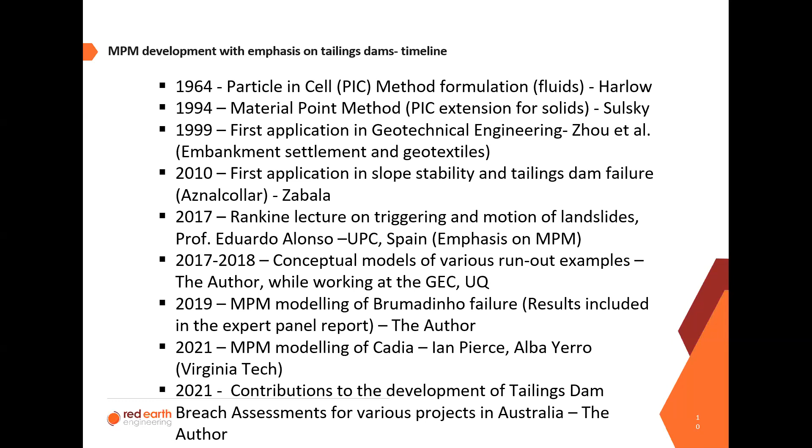The 2017 Rankine Lecture had an emphasis on MPM application for landslide motion. I'm including some of my own work here, because between that period we developed a number of conceptual models for various runout examples when I was working at GEC at UQ. In 2019, I had the opportunity to apply MPM modeling to the Brumadinho failure, and those results were included in the expert panel report.

Since then, in 2021, MPM modeling has been done for Cadia, work done at Virginia Tech upon my recommendation to ALBA. Also in 2021, there have been a number of contributions to the development of tailings dam breach analysis. Luke shows some of the results, and we have applied some of these techniques as well at Red Earth Engineering.

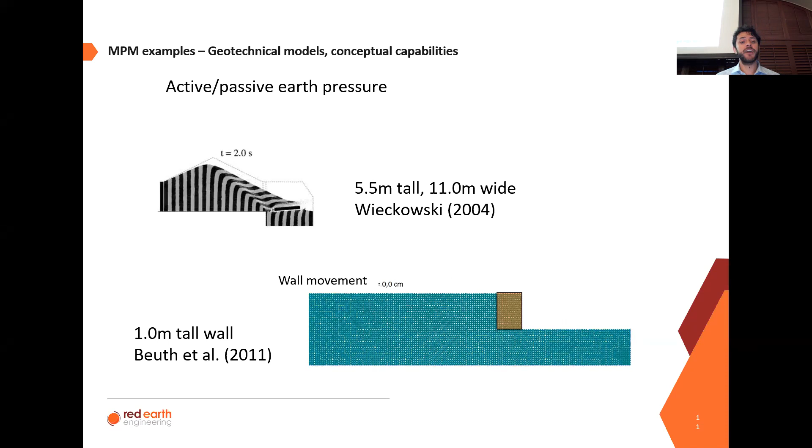Okay, so this is how MPM looks like. We have seen this maybe on the news, or hopefully not in your workplace: a failing retaining wall. You can fail a retaining wall either by active pressures, which is what you see on the left-hand side animation, or through passive stresses, which is what you see on the right-hand side at the bottom.

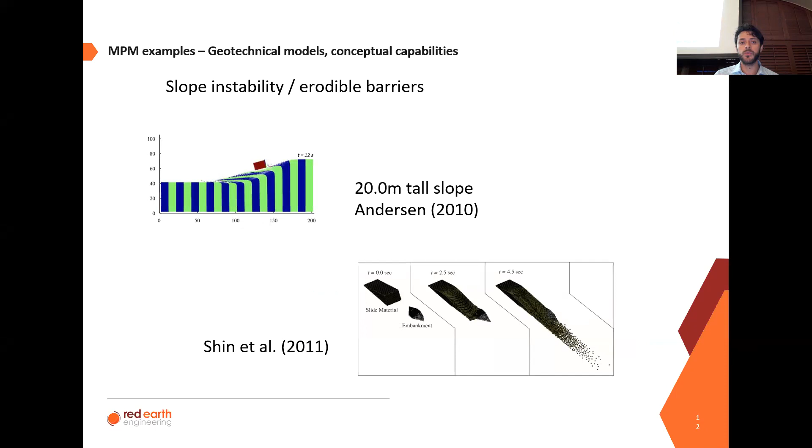You can also apply MPM to slope stability and also to erodible barriers, which is what you see at the bottom.

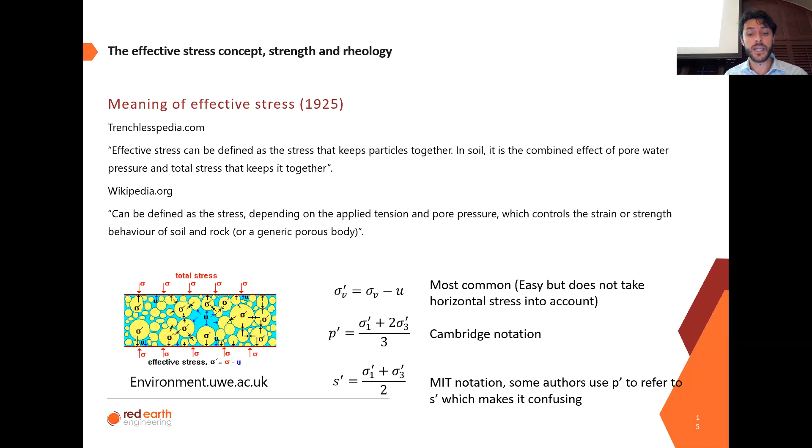So again, talking about effective stress concept, strength, and rheology - usually when you go to a specialized lab and ask for rheological characterization, you're going to get something like this. You're going to get a yield stress curve that shows the progression of strength with solid mass fraction, and you're also going to get a variation of shear rate with shear stress for different solids content. But we were told that soils are also affected by the effective stress concept, so we don't really get that information. So does it really apply?

Reading through the literature, I found this paper called 'N-like rheograms of suspension of magnetic nanofibers.' It's the rheological characterization of a slurry that has magnetic particles in it. The behavior of those magnetic particles upon shearing defines what they call the N-like rheogram, where you have a peak at low strains, then you soften, and then you harden again.

The authors go further and say you can deconstruct that behavior and draw the green line that you see there - the green line is number 1 for those of us here, we can't really see it very well. And then you have the red line, which is number 2. So you have that behavior, which looks a little bit funny, but you can decompose it between 1 and 2. You say, oh well, okay, that's rheology, you have that behavior on magnetic particles - why are you showing that to us?

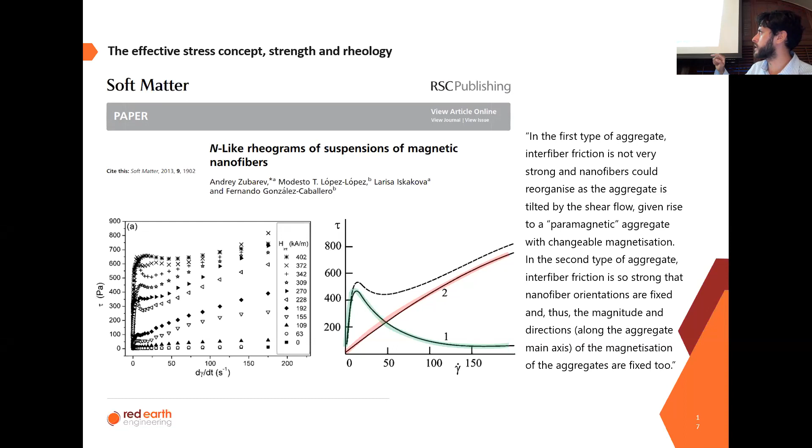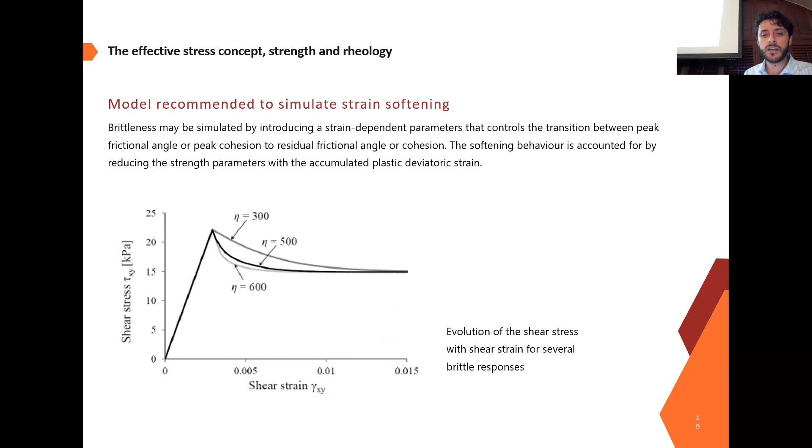Well, brittleness, which describes this kind of behavior, may be simulated by introducing strain-dependent parameters that control the transition between peak frictional angle or peak cohesion and residual frictional angle or residual cohesion. The softening behavior is accounted for by reducing the strength parameters with the accumulated plastic deviatoric strain.

Okay, I want to pause here to summarize what we just discussed. The effective stress concept has been known to influence the mechanical response of granular arrangements during loading. Specifically, an MPM model can simulate the initiation of failure in the transition between a static, solid state, through a deformation process that can result in liquefied tailings.

Limited rheological testing under confining stresses exists. Available results suggest that confining pressures have an influence on the rheological response of materials, especially during the solid to fluid transition.

A detailed study about the role of different constitutive models in MPM simulations of granular column collapses is presented by Fernandez and Soga, 2016. Now I'm going to move into a number of case studies, some of which I have authored, and some of which were done by others.

So this geometry is actually the geometry that you see in... the tailings in Cadia weren't actually liquefiable. Sorry, no, this is not Cadia, this is Mount Polley, my apologies. So the tailings in Mount Polley weren't actually liquefiable, and the reason they flowed was because they were eroded by the ponded water on top of them.

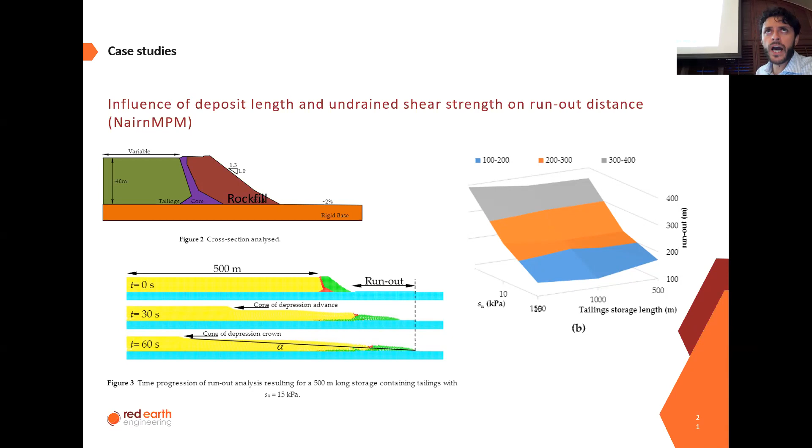Nevertheless, we use this geometry to try to understand, from a geotechnical engineering perspective, how the dimensions of your tailings storage, represented by the storage length in the plot on the right, will affect your run out, while also taking into consideration the undrained shear strength of your tailings. What we concluded in these studies was that tailings storage length didn't actually have much influence, and the main driver of run out distance was the undrained shear strength.

This is the Brumadinho model. This was a model we had the opportunity to develop during the expert panel review process.

I am citing here exactly what is written in the report. I don't want to say anything that isn't written there. But basically the text on the left describes step by step what was seen during the failure.

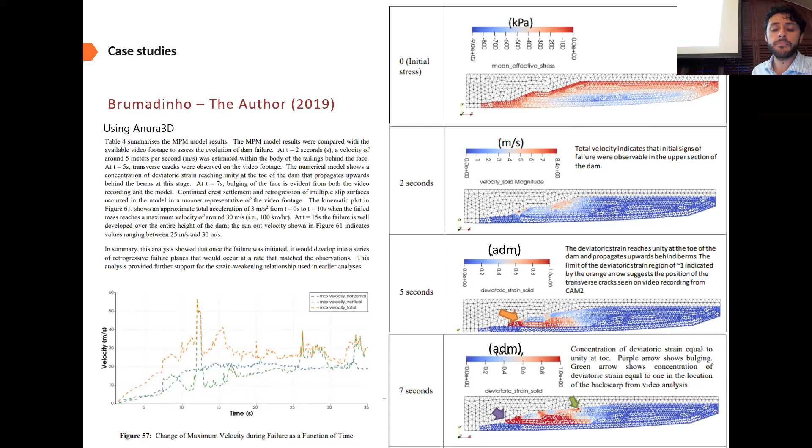The last case study I have to share with you is the Cadia, which was done as part of a master's study in Virginia Tech, published this year.

We are all more familiar with this case because we're in Australia. So I'm not going to go into the details, but I just want you to see the progression of the deviatoric strains, showing where the fail zones are.

I want to draw your attention to the second figure in this slide, which shows the location of the pump house initially, drawn as the rhomboid figure in black, and how it looks at the end, either in the MPM model or during field observations. The resemblance was quite remarkable.

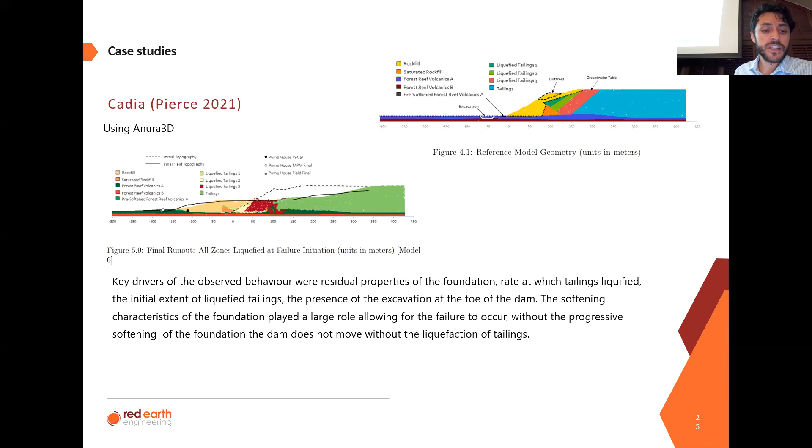The study found the key drivers of the observed behavior were residual properties of the foundations, the rate at which tailings liquefied, the initial extent of liquefied tailings, and the presence of the excavation at the toe of the dam, as we already know. The softening characteristic of the foundation played a large role in allowing the failure to occur. Without the progressive softening of the foundation, the dam does not move without the liquefaction of tailings.

Summary and final thoughts: we have covered related aspects of the numerical modeling of tailings dam breaches from a soil mechanics perspective. The review covered mobility of tailings, the role of large deformation modeling in TDBA, the relevance of the effective stress concept in tailings dam breaches, and several case studies.

MPM is a growing technique. There is still no commercial software available yet, but there is a vast technical source on the web. Despite all the advantages mentioned, there are still limitations. Applicability is still limited to 2D problems.

We have addressed these limitations by coupling the MPM outputs with hydraulic engineering software, as Luke presented earlier today, which results in a better product for the clients. The publication of the recent GISTM with emphasis on alarm concepts and the new CDA bulletin will likely accelerate the wide implementation of this kind of technique and other similar approaches in the industry.